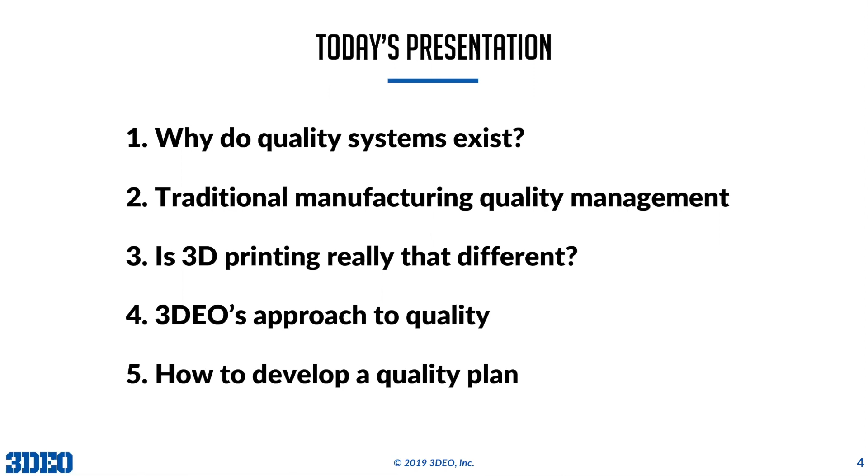Oops, sorry, went the wrong way.

Okay, we're going to start off with definitions just to make sure everybody understands what we're talking about. When I talk about 3D printing or AM or additive manufacturing, I'm talking about the same thing. It's about digitally manufactured parts in an additive fashion. So those three terms are pretty much the same. I'm going to use them as if they're the same in this presentation.

Process control is really understanding predictability of output. When you have a controlled operation or a controlled process that you're dealing with, that process has predictability of output, or you know what's going to come out of that operation. Capability is different than control. Control just tells you what your distribution looks like in terms of what your output is at whatever process you're dealing with and whatever critical variables you're monitoring.

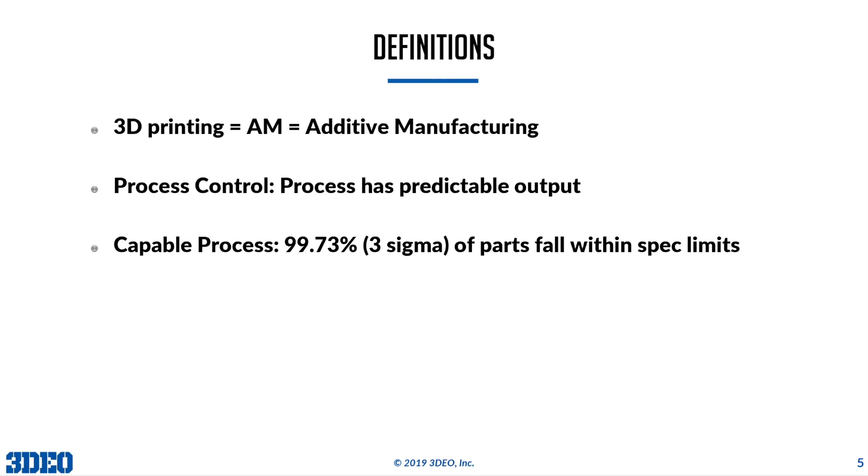Capable processes are processes where all of the distribution coming out of that process is within the spec limits of the part. So 3 sigma is usually the CPK of 1, or saying that the processes are capable. So if you have a capable process, 99.73% or more of your parts fall within the spec limits of the part.

Metal 3D printing is comprised of many different technologies. I'm sure most of you are aware that there's plenty of different technologies to deal with. There's our process at 3DEO. There's all the laser sintering processes, binder jetting, and all the other products that are generated from additive manufacturing in metals. So when I talk about these different technologies, I'm just talking about a grouping, and we'll talk about each one.

When I talk about prototyping, I'm talking about 10 parts or less. In production, we're talking about ongoing serial production. So production is really the volume, and that's what we're going to focus on today. Parts that are coming out in larger volumes greater than the 10 parts for prototypes. And for 3DEO, we're going to talk about 100 to 10,000 a month, which Matt covered earlier.

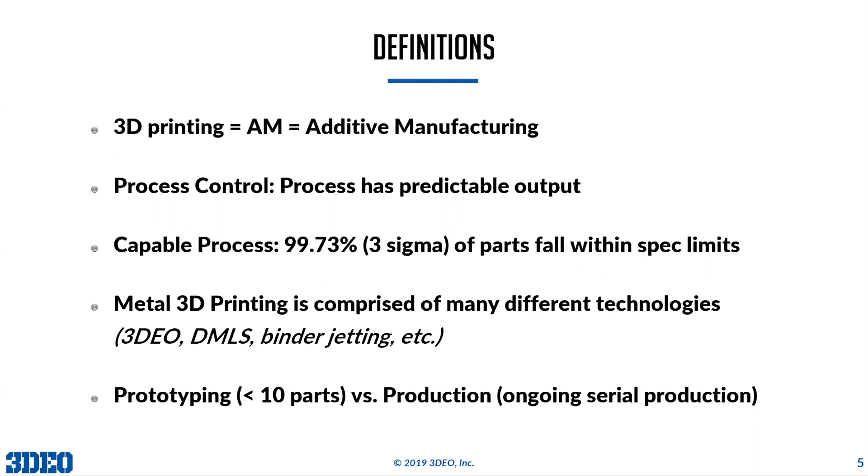Okay, my first thing is, why do quality systems exist? They exist to provide products that consistently meet customer requirements. So basically, if you have a prototype, you can measure all the dimensions on the prototype, and you can rework it if necessary and do post-operations to make it work. To be competitive and to have quality volume manufacturing, that's not the best way to go. As a matter of fact, it's usually impossible from a capability and a cost standpoint.

Also, if you're 100% inspecting the parts, there's no chance that you're not going to get escapes. Statistics say that escapes will occur. So the real reason for doing quality systems is to assure that you make quality parts and build that quality into the process and don't inspect it in at the end.

Also, quality systems help us understand our process capability and ensure repeatability of parts. So the systems that you put in are really meant to give you feedback on how your process is flowing and if everything is working as predictable and if those distributions are within the spec.

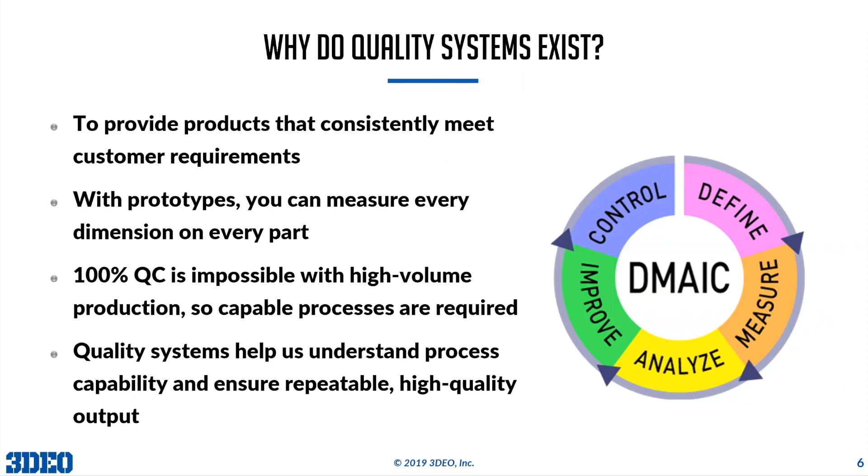Okay, now we're going to talk about traditional manufacturing and their quality management and how that works. To start off with, traditional manufacturing has effective process controls. They couldn't not have effective process controls and still be volume manufacturers. The CNC machining industry has over 30 years of experience in process control systems and development. So they've been able to take all the variation that they have and develop control systems around it to get

predictable performance output. Now, it wasn't like they started out and didn't have any problems or variation in their process. They had tool wear, how they set up the machines, all the different machines they were trying to run. And what they've done is taken the known systems for doing quality control and optimized them for their processing, to give them process controls that tell them what to do and how their performance is going to be. So when they look at their process, they look at the tools, they see the way the tools are wearing, they develop degradation curves, and they know to check the parts to monitor that and when to change the tools.

There's a lot of other variation that occurs. I've listed them on the side. Some of it is lot-to-lot variation, operator dependencies, feeds and speeds, etc. But they've been able to work around it. My point is, they've had 30 years of experience. They figured out how to do it. It works well today. There's a good number of shops out there that are totally capable of meeting requirements in today's environment.

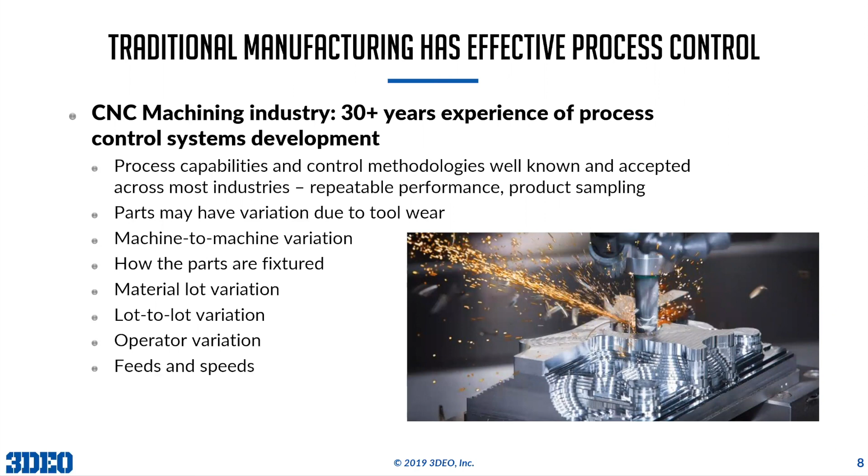The next one is metal injection molding. They've also had about 30 years of experience. They had significantly different variables to deal with. The good news is that they were able to build quality plans around their variability and came up with process controls that allowed them to control their variation and get predictability of parts. They also had to work with a lot of variables: the sintering process, molding variation, post-processing variation, tool wear and degradation, lot-to-lot, a lot of different things. In addition, material variability and humidity variation.

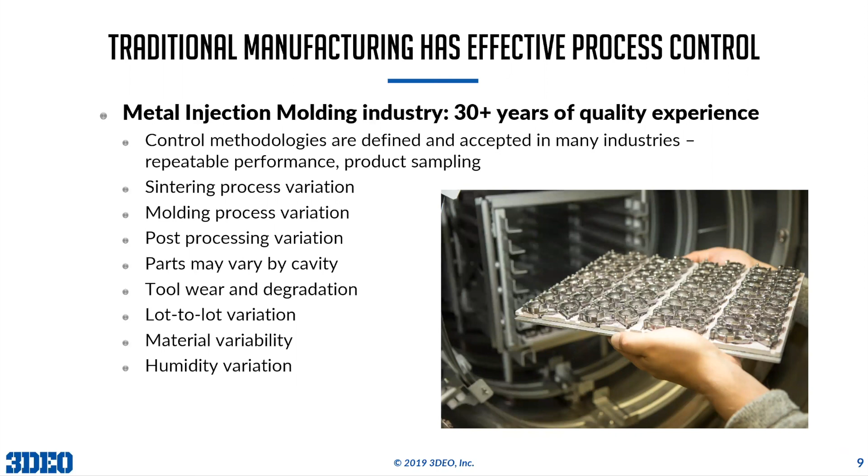So again, they took a traditional process. It took quite a while. They developed process controls around it, and they were able to get predictability of performance based on those control mechanisms.

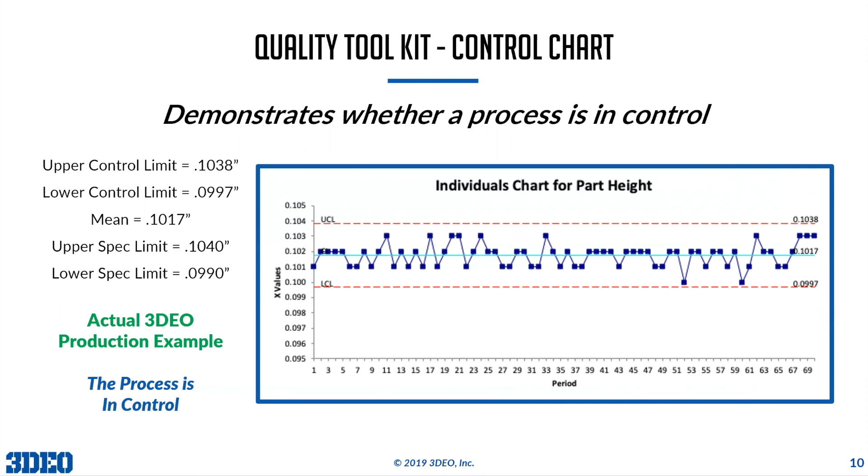So these are two of the charts that I use in the startup of an organization that allow me to understand process capability and assess control within each process that I set up.